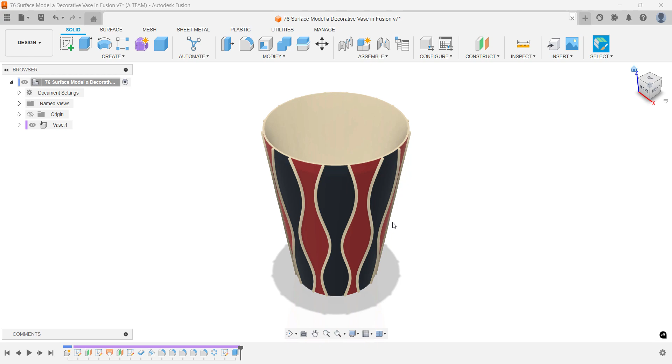In this tutorial, you'll learn how to seamlessly blend surface and solid modeling techniques to create this vase. Keyboard shortcuts are displayed at the bottom left, and as always, we'll start by following Fusion's first rule: creating a new component.

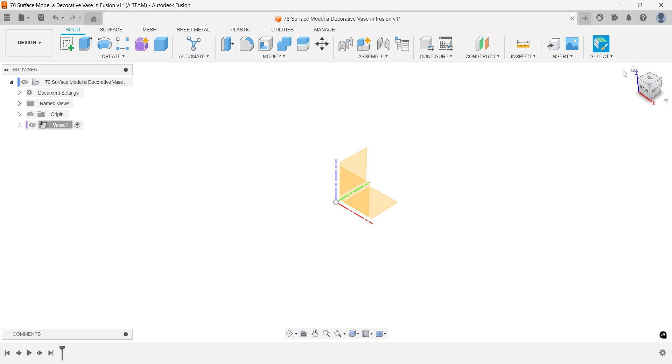Start your sketch with a center diameter circle positioned at the origin on the horizontal construction plane. Set the dimension to 100 mm if you'd like to follow along with my dimensions. Using a circle gives you better control over this part of the vase, which will make the final steps easier.

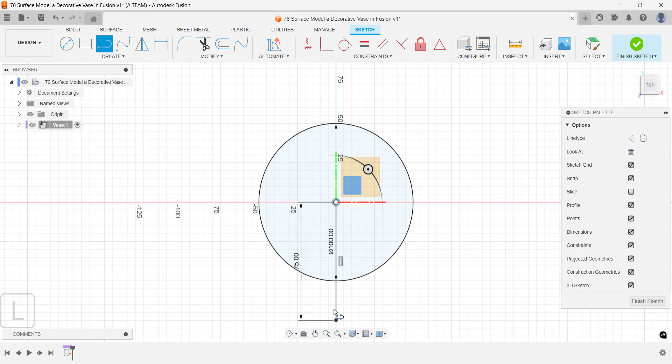You only need to work with a portion of the circle, but it's important to know what fraction you're using so you can create a pattern with the correct quantity later. To do this, draw lines to define a segment that represents 1/8 of the total circle. Since a circle has 360 degrees, dividing it by 8 gives you 45 degrees, but you'll work with half of that: 22.5 degrees, or 1/16 of the circle.

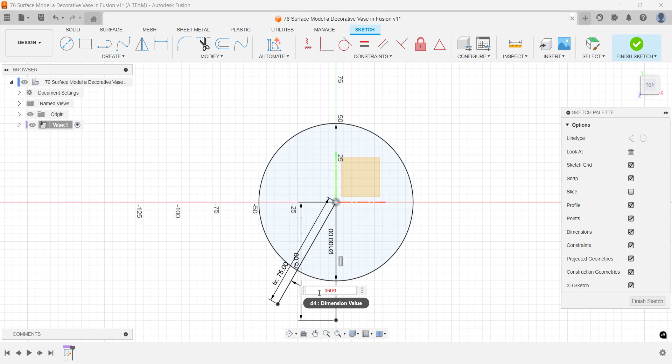Next, set up the 22.5 degree angle on the other side to complete your total of 45 degrees. The black lines indicate that your sketch is fully constrained, making it more predictable and easier to work with compared to blue sketches, which aren't fully defined by rules or constraints.

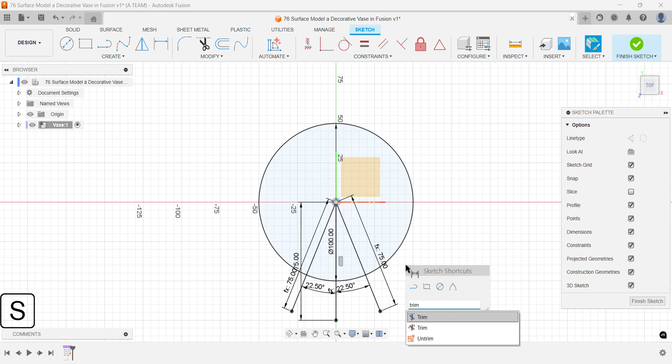Later, you'll use surface modeling commands to loft a specific 45-degree segment, trim away the parts of the circle you don't need. You can keep the other sketch lines even if you don't need all of them; they might come in handy during future edits in the Fusion timeline.

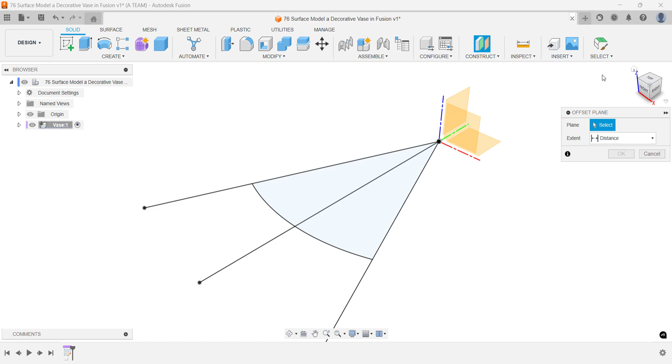Set up an offset plane 200 mm above the horizontal construction plane. Then use the view cube to reorient your view so you can clearly see both the sketch and the new plane.

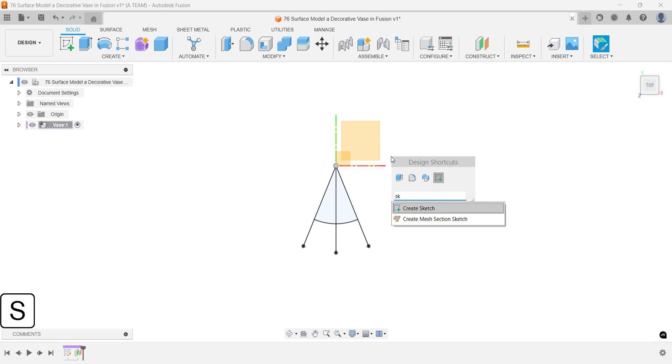Create a new sketch on your offset plane and use the project tool to bring in a linked copy of your original sketch geometry. Because it's linked, any updates to the original sketch will automatically update this one too.

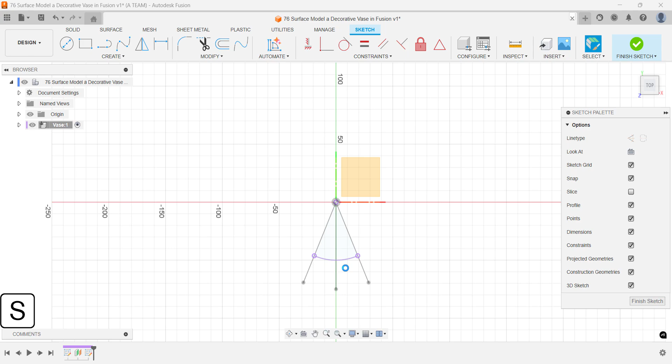Offset the projected sketch by 30 mm. Even though it's larger, it still represents 1/8 of a full circle, which will fit perfectly when you later create a pattern with a quantity of 8.

Before moving on, click the Home button next to the view cube for a quick quality check to make sure your sketches are properly positioned on different planes.

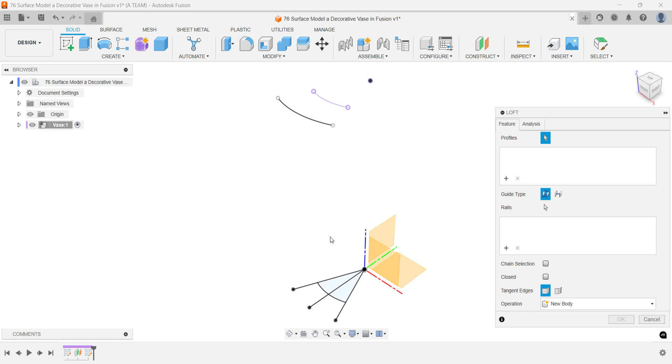Use the Loft command from the surface modeling tools to connect your open profiles. Since the profiles aren't closed, you need to use the surface loft instead of the solid loft. I'm keeping it simple by using Fusion's default settings for this operation.

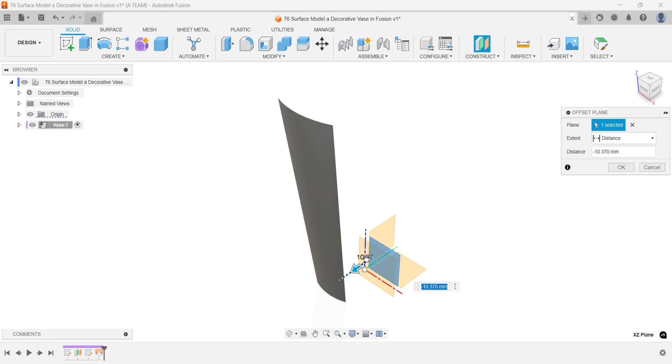Now create a new offset plane in front of your surface model. The exact distance isn't critical; I'm using 150 mm, but anything with a little margin from the surface will work. This extra space gives you room for future adjustments if needed.

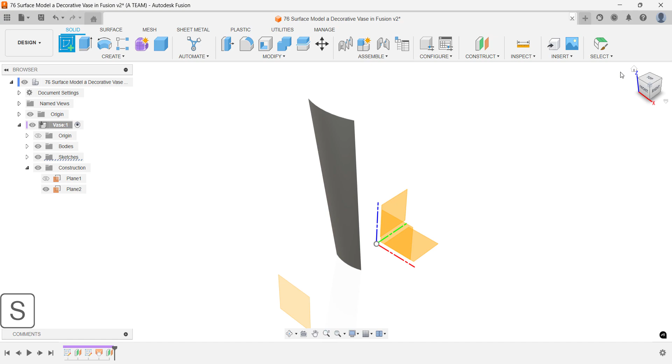This is a perfect time to save a new version of your project before moving on to the pattern. Once you've saved, create a new sketch on your latest offset plane. Press and hold the mouse wheel to pan and reorient your view if needed.

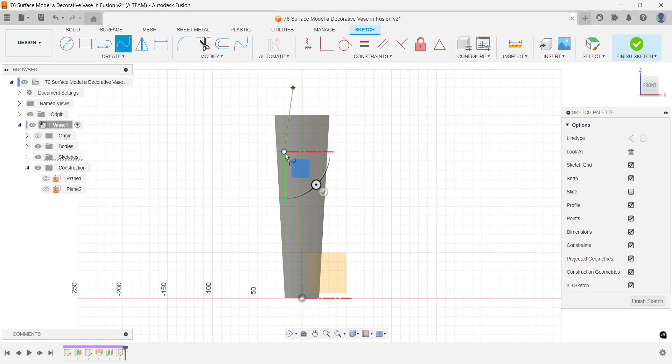Use the Fit Point Spline tool to draw the shape. It's ideal for this kind of work because it's easy to sketch and adjust. Start your Fit Point Spline above the shape. This makes it easier to finish with a clean straight line toward the top later.

Create a quick first draft that captures the essence of your design idea. Don't overthink it, just get the big picture down. Finish the spline below your surface model for the same reason; it'll give you better control over how the end connects at the bottom.

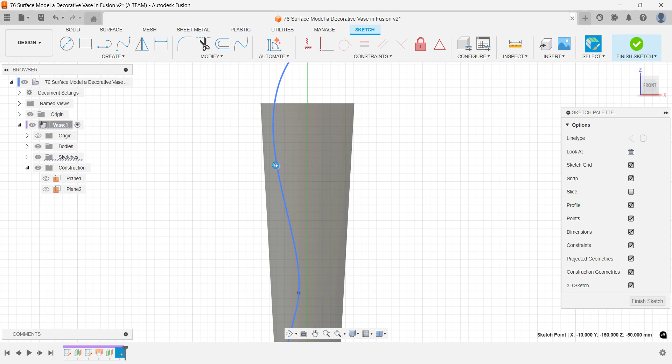It's easy to adjust both the control points and the curvature by moving the green handlebars. As a rule of thumb, keep the number of control points low. You don't need many because the spline is so flexible.

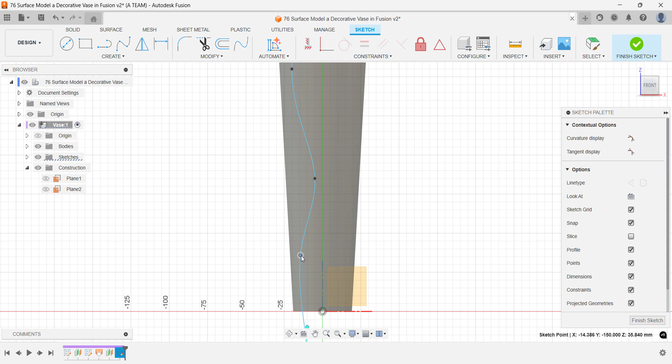Next, offset your spline to create a second spline outside the first. This new spline stays linked to the original, so any adjustments you make to the first spline will automatically update the offset as well.

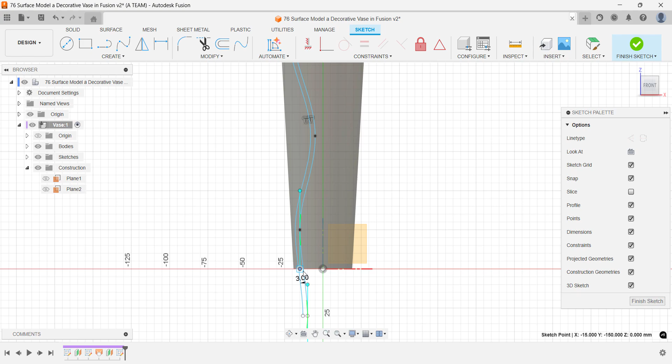There are some pros and cons to this workflow, which we'll cover at the end of the tutorial. One clear advantage is how it lets you see exactly how the pattern looks within a single 1/8 segment of the vase's circumference. For the next steps, you'll need a closed profile, and you can easily create that using the line tool.

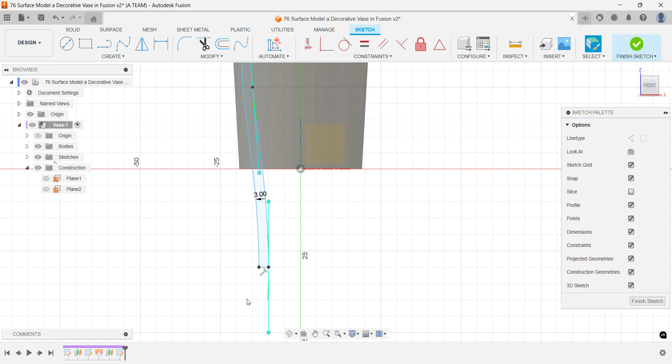You'll know the profile is closed when it fills with a light blue color. It's tempting to keep refining the sketch, but you don't have to perfect it now.

Mirror your closed sketch profile. Make sure to select both splines and both lines.

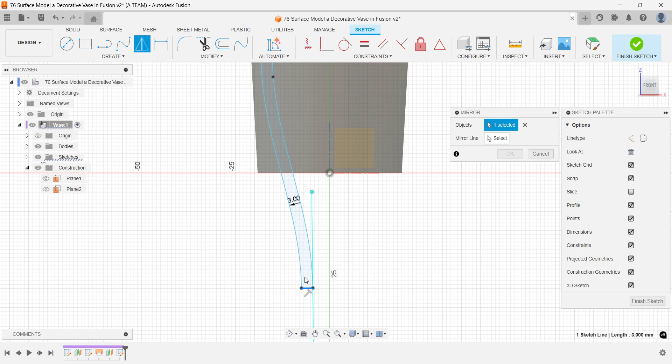Use Orbit to reposition your view and select the vertical construction plane at the center of your model as the mirror plane.

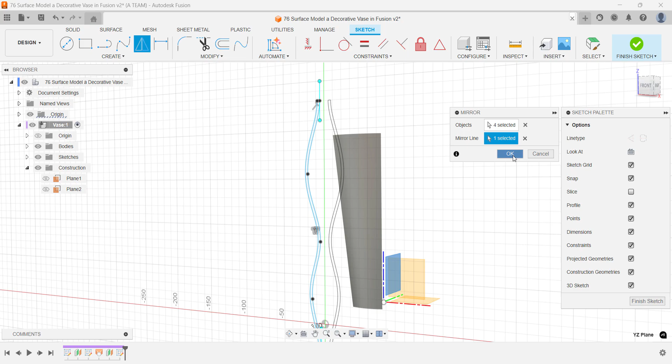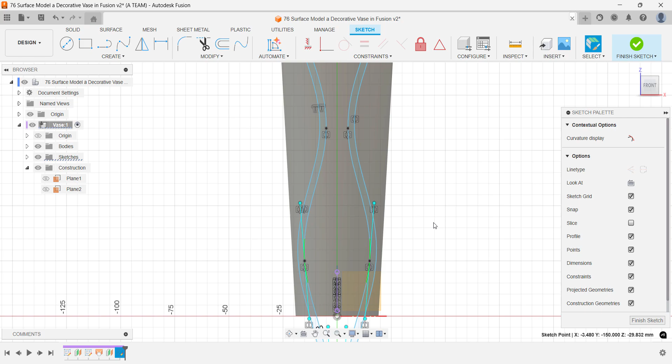After confirming the mirror operation, you'll notice it's even easier to fine-tune your design now with the mirrored profile in place. You can always revisit and adjust this sketch later through the timeline, but for now, this version is good enough to move forward.

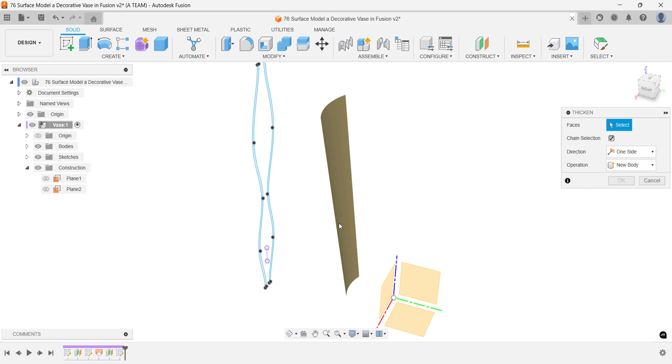Now, thicken the surface 2 mm inward to preserve the outer dimensions of the vase. If the direction is opposite to the blue arrow, set the distance to -2 mm. Make sure the operation is set to New Body.

You are now ready to apply the sketch profile to the solid body. Activate Emboss and select both closed sketch profiles.

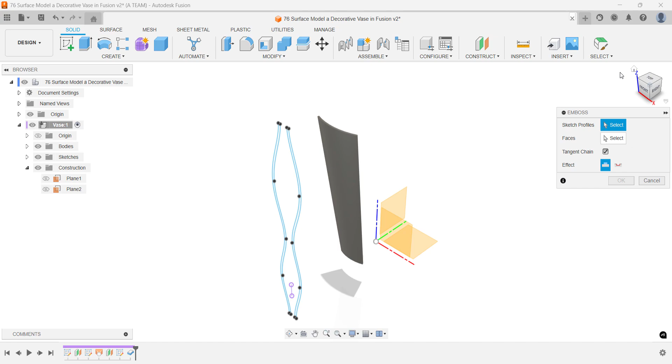Set the effect to Emboss so the profiles stand out from the face.

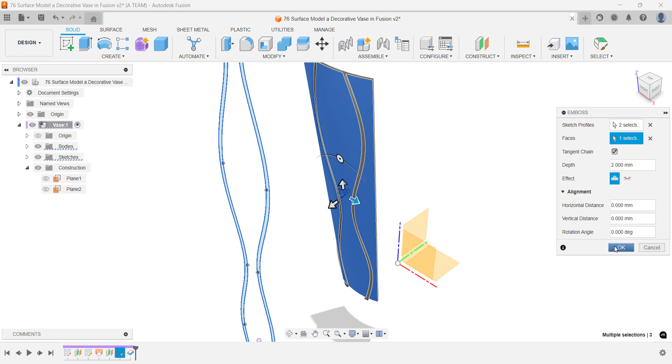Set the depth to 2 mm and leave all alignment settings at 0. They are not needed here. Once you confirm, the sketch profiles will appear on the solid body.

Well done. To save time, improve quality and reduce errors, make your adjustments to this 1/8 section before multiplying it. Start by adding fillets to the embossed sketch.

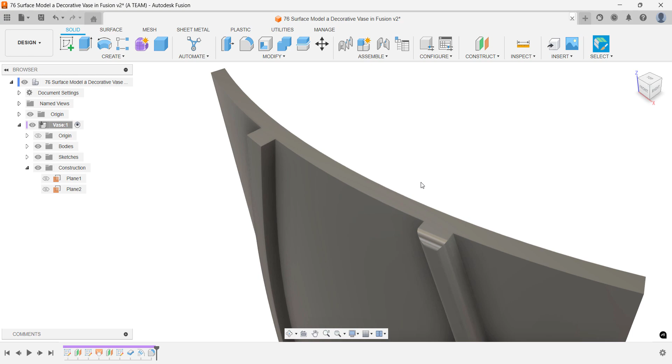The selection order matters. Using the rolling ball setting on all edges at once gives a different result than filleting the edges first and the top separately. You'll need to fillet both patterns since they come from 2 separate sketch profiles.

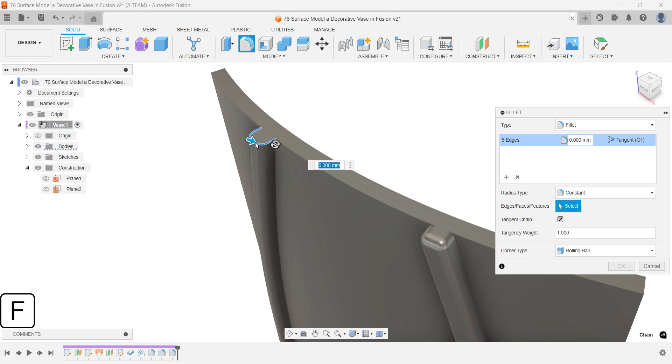An alternative workflow is to emboss just one profile and then mirror it. This keeps your sketches and 3D edits simpler, but you lose the visual aid of having both mirrored profiles visible when adjusting the splines. It's not just about finding the most efficient workflow, it's about discovering modeling practices that suit your personality and feel intuitive so you can make the most of your talent.

And don't forget to fillet the bottom, it's an easy step to miss.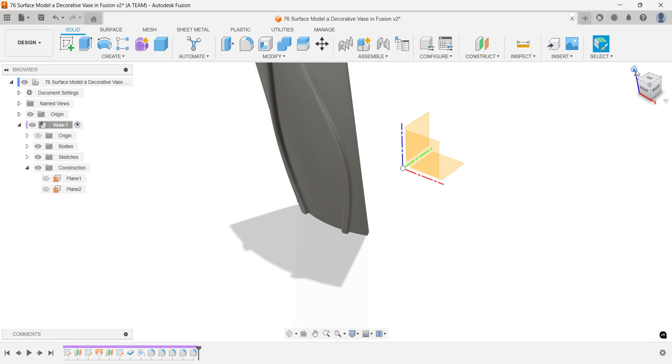To make this video more enjoyable, I'll show you how to add a custom appearance to part of your solid body. Then we'll skip ahead, since watching me tweak colors for 2 minutes isn't the best use of your time.

Start by searching for a base color and applying it to a face.

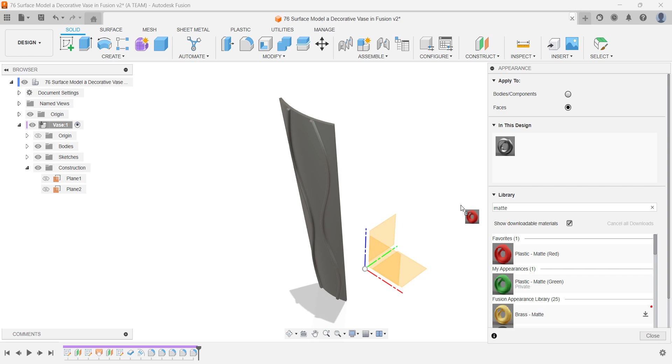Right-click the color in the Appearance menu and choose Edit. You can enter RGB values here, and 2 levels deeper, you can also use hex or HTML color codes.

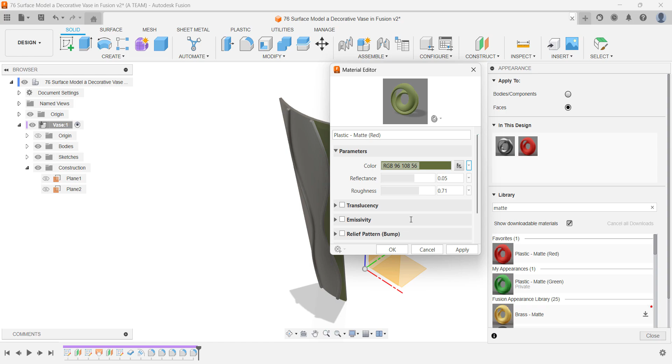For inspiration, you can find color palettes online with well-matched tones. When you need more custom colors, just duplicate the one you've edited and repeat the process.

Well done! You're almost finished with your Fusion project. There are still a few important steps left, and now's a great time to save your file before multiplying this part of the vase. As a general rule, it's smart to save before asking Fusion to run complex calculations.

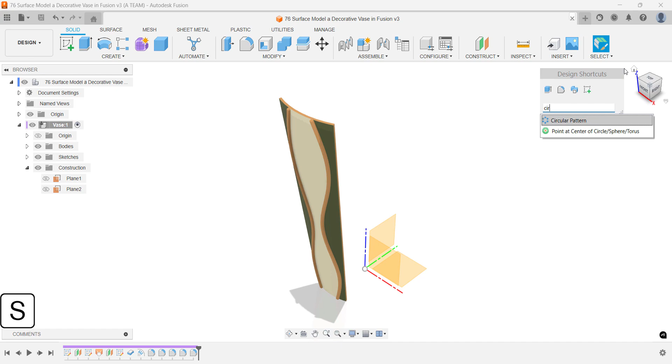Having your design centered above the origin helps when creating a circular pattern. You can easily select the blue Z-axis as the pattern axis.

Fusion suggests a quantity of 8, which is perfect, since 360 divided by 45 gives you 8 instances. Make sure the distribution is set to full to complete the full circle.

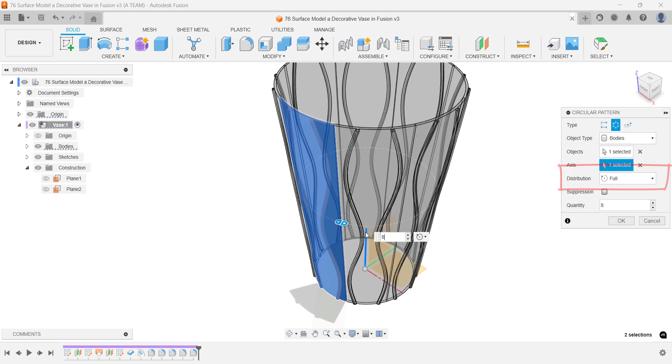Everything looks good so far, but there's still a large hole at the bottom of the vase that needs to be addressed. This is a good time to discuss some pros and cons of this surface modeling workflow while you fix the hole in the bottom.

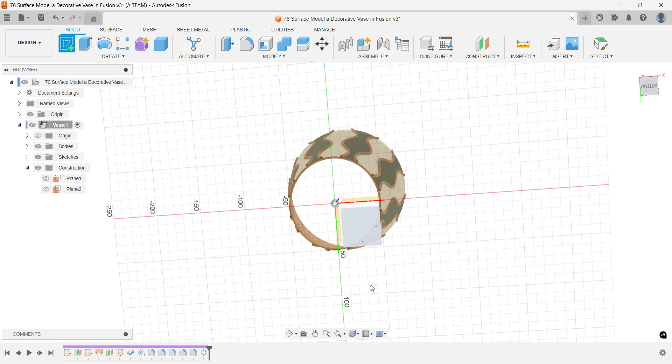When you use the Sketch Project tool, it can be time-consuming to select the small fractions of each circle.

A quick solution is to add a circle, but this circle won't be linked to the rest of the model, meaning it could be too big or small if you change the bottom dimensions of the vase.

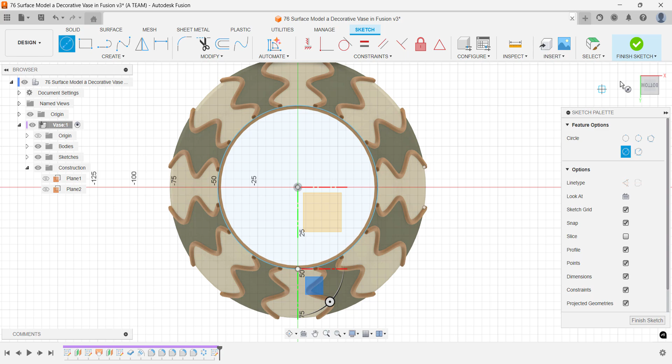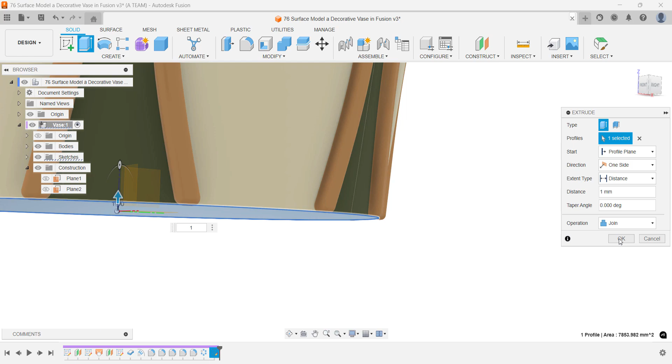While extruding the circle is easy, be mindful of the small gap that may appear between the vase and the circle if you extrude without a taper angle. This might be fine if you're using the vase for dry flowers, but it could cause issues with stability and water tightness if you're planning to use it for water and soil.

Revisit the Appearance menu to apply appearances to the new parts of the solid body.

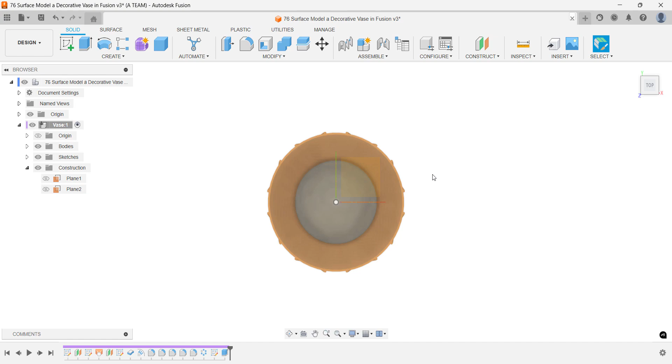One advantage of the surface modeling workflow in this tutorial, as mentioned earlier, is the ability to sketch on a controlled section of the vase, 1/8 of the total circumference. Another benefit is the added flexibility that surface modeling provides.

As an alternative, you could create the full solid vase from the beginning, use the Emboss command, and apply a circular pattern to the Emboss design. Your 3D printing settings and manufacturing options can also influence the modeling structure choices you make.